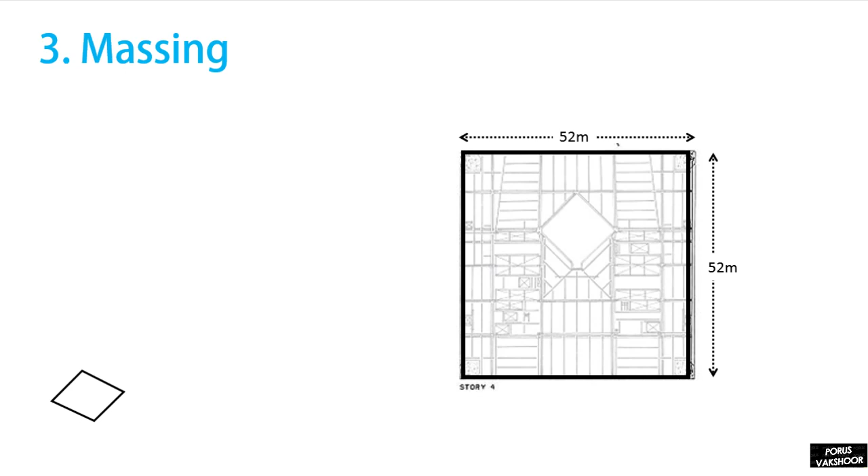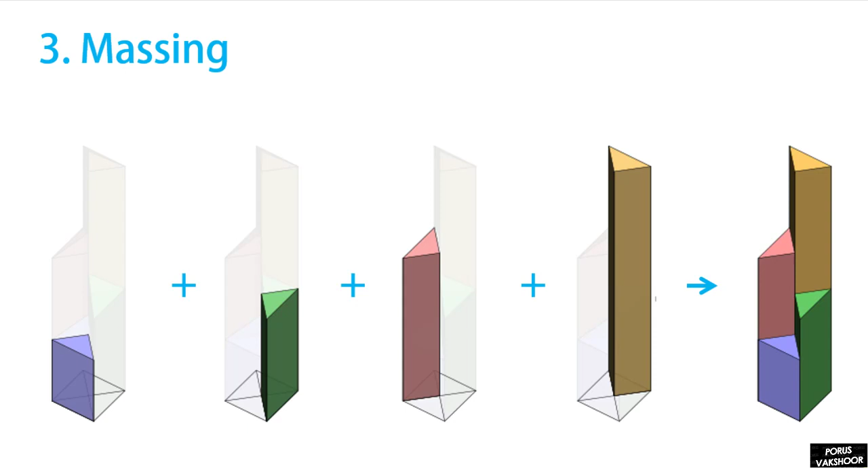The tower has a square base of 52 meters each side, which is divided into four quadrants. Then each quadrant is lifted in separate intervals, which enforces effective structural stability. This led to a simple geometric form which responds to the project brief, leading to a unique simple form. The tower geometry was a direct response to the site and the project brief. The building form is stable to resist high velocity wind forces. This bamboo shoot structure is highly efficient, which reduces the amount of steel and construction that a typical tower of this scale would take. This simplicity also increased the speed of construction and turned out very economical.

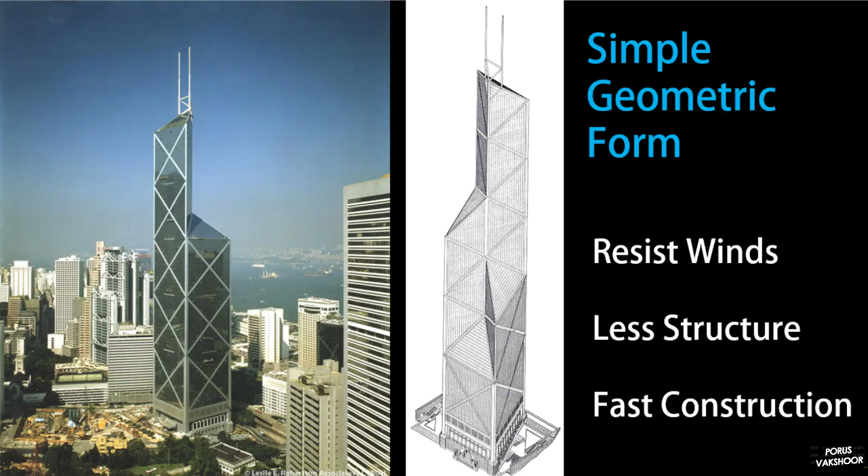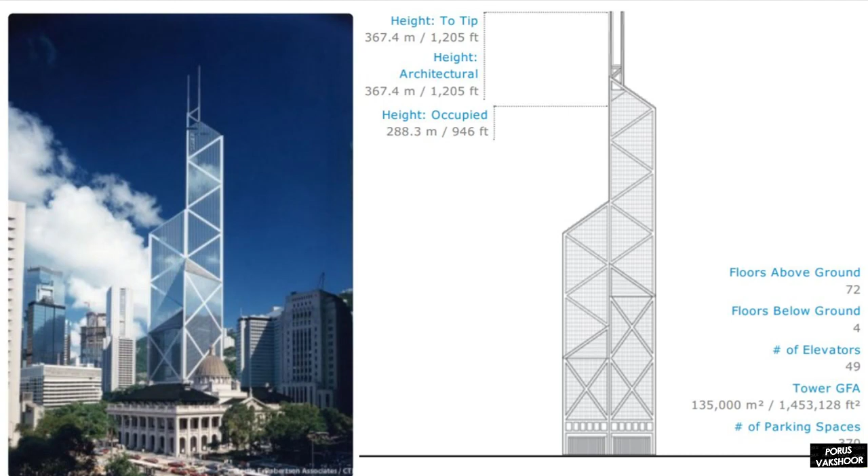I.M. Pei says, I believe that architecture is a pragmatic art. To become art, it must be built on the foundation of necessity. The design of this tower was based on the foundation of its initial project requirement of a tall structure with economic construction which is stable in a high velocity typhoon environment.

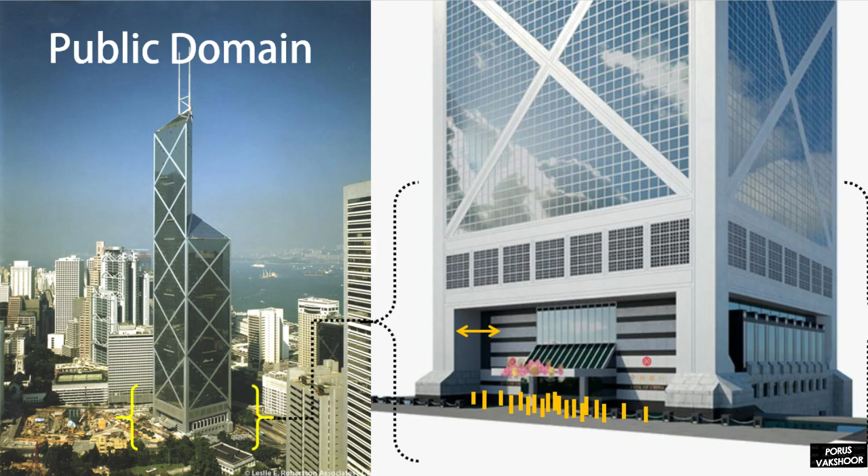The tower is designed to respond to the site and pedestrians at street level. The building is recessed inside to create more open space at ground floor. This enables an active public domain with smooth circulation for visitors. The sloping site was integrated into the design with engaging landscape design for people. A row of trees was planted to reduce traffic noise near the building.

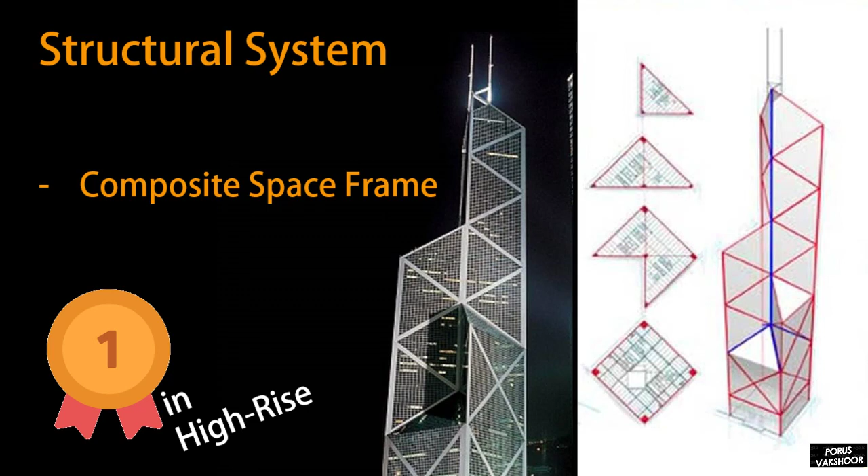The tower uses a steel frame structure with reinforced concrete, which was used for the first time in a high-rise construction. All the load of the tower was directed to four columns on the ground floor, which enabled large open plan interiors for commercial use. The structure is expressed in its exterior form in its truest sense, making it an icon in the Hong Kong skyline.

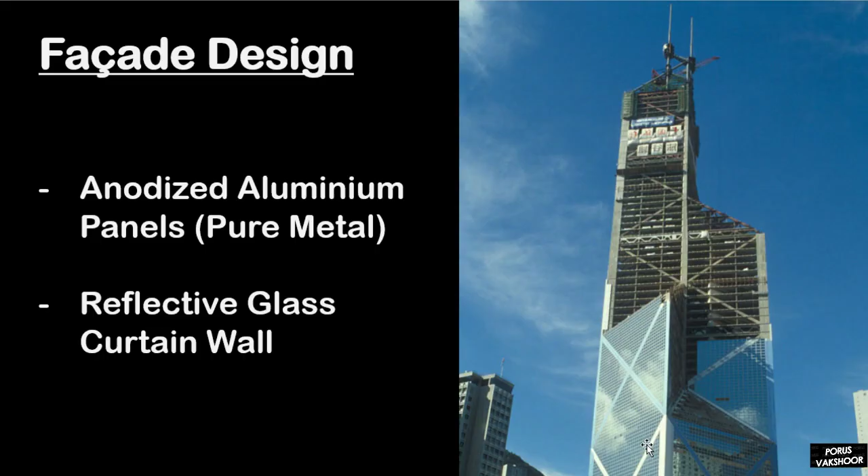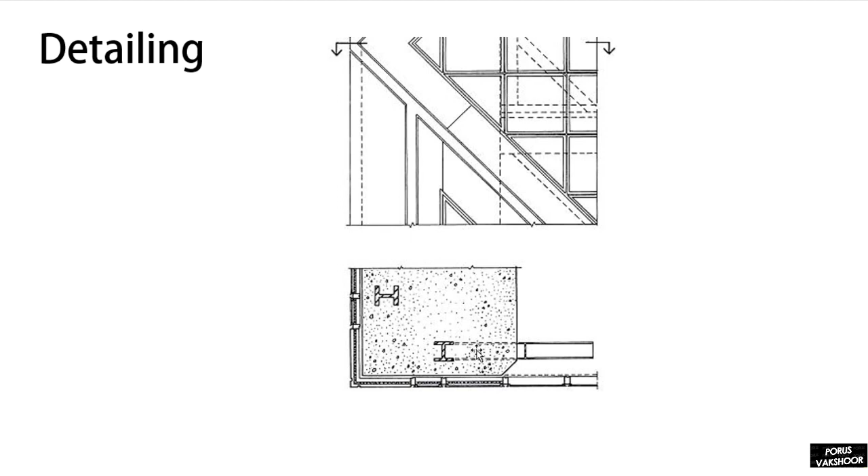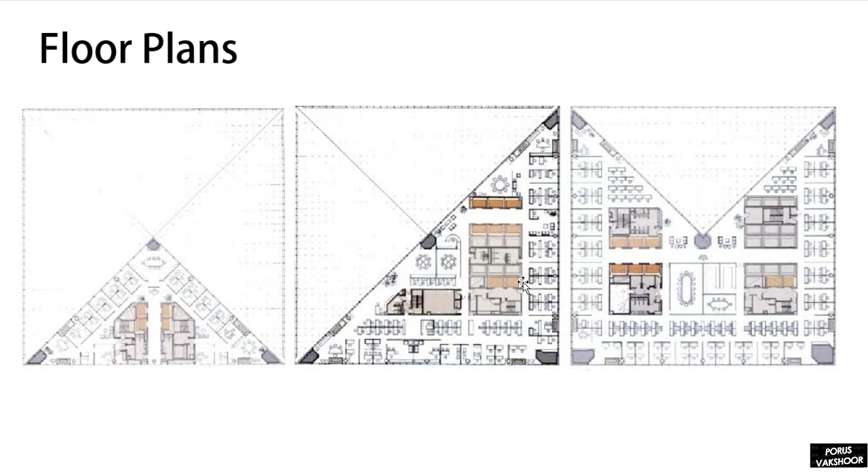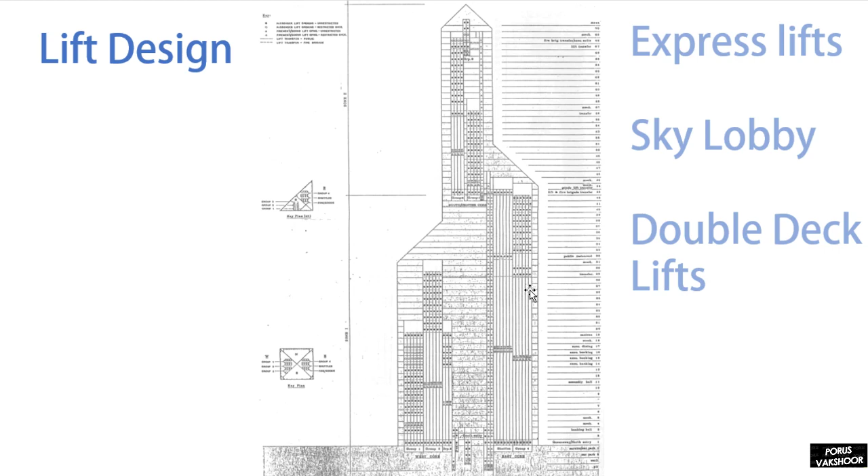The floor plans are well designed to have large office spaces without any internal column, with wide views of the surrounding city. The lifts, staircases, and toilets are located at the center for effective circulation and structural stability. The lifts are specially designed to reduce travel time and enable transfer of large volumes of traffic. Historically, tall buildings are possible only because of the invention of elevators, which enabled humans to travel vertically across several floors without any effort.

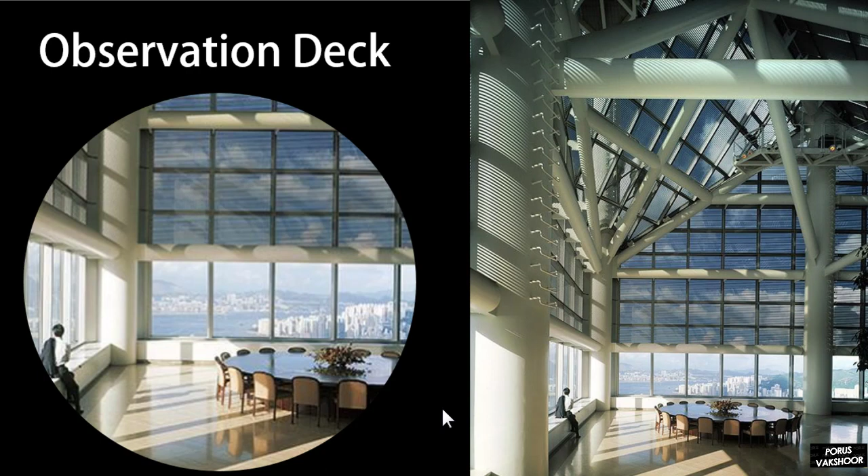Now let's experience the tower from inside. The geometric form has been expressed truly in the interiors of the building. When you enter the building, we experience a grand lobby which expresses the triangular form in the ceiling. Further, there is a skylight which is as tall as 1/4 of the building height. This allows natural light to penetrate into the building. There is an observation deck at the 43rd floor which is open to the public. It provides unique views of the city to its citizens and public.

The commercial floors have column-free spaces which enable flexible furniture layouts and clear visual connection between workers. Personally, I think the space would look far better and more spacious if the glazing reached up to the ceiling height. This is a classic example of two rooms, one with a straight facade and another with an inclined facade. A low cabinet is introduced to make efficient use of the corner space.

Well, to summarize, this project has a strong concept which is derived from the context and culture of China. It responds to the typhoon weather with a structure which is integrated into the design with simple form and material. Further, it provides exciting interiors, atriums, and observation decks for tenants and public use.